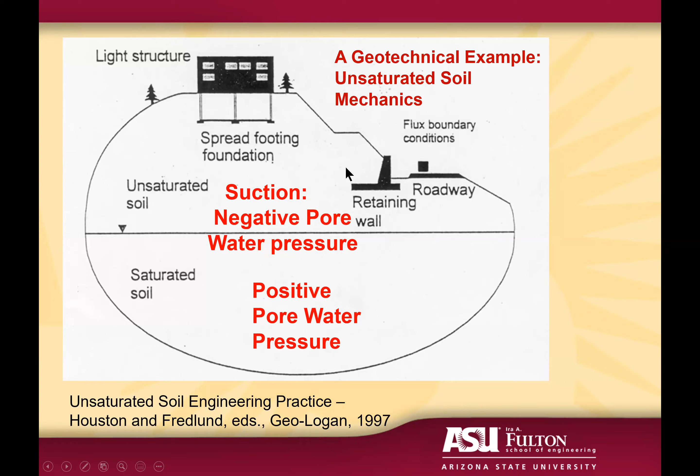We started our geotechnical profession thinking about saturated soil, and we find that we live most of our life up here in the unsaturated zone. So what is the problem with implementation? Why is unsaturated soil important in geotechnical engineering practice? Well, again, a lot of things we do are above the water table.

It impacts slope stability, bearing capacity, settlement, pavements, deep foundations. There are collapsible soils, which compress when they're wetted, expansive soils, which expand, dams, embankments, retaining walls. This is just a few examples of why unsaturated soils is so important in geotechnical and civil engineering.

A very well-known example of why it's important is a case study of a slope in Hong Kong that was presented in 1987. The slope we talk about here is very high, 90 meters or so, relatively steep, located above the groundwater table, which is here. So we're talking about this slope above the groundwater table. And at the base of this slope is an existing building.

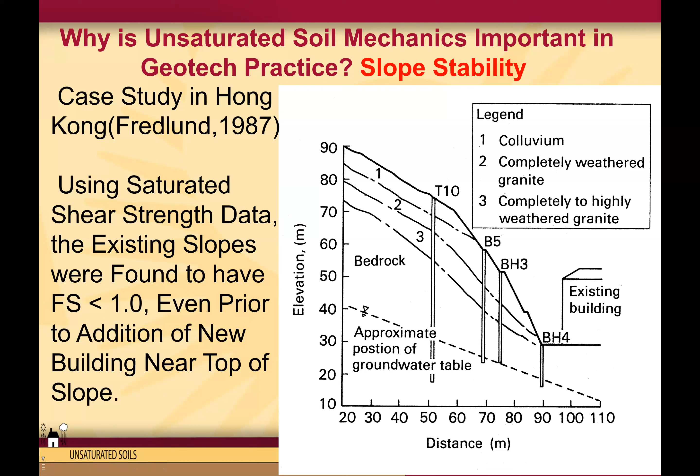The idea was they were going to do some construction at the top of this slope and wanted to study its stability. Using saturated shear strength data, which is typically used in geotechnical engineering, the existing slopes were found to have a factor of safety less than 1 even before the building was to be put in place. So this was an unacceptable situation.

So if we bring in unsaturated soil mechanics, now what happens is we find that above the water table, we actually have some negative pore water pressures, or some suction. And these suctions are not great. They're in the neighborhood of 40 to 50 kPa, but they're quite stable because anytime we're above the groundwater table, we have negative pore water pressures.

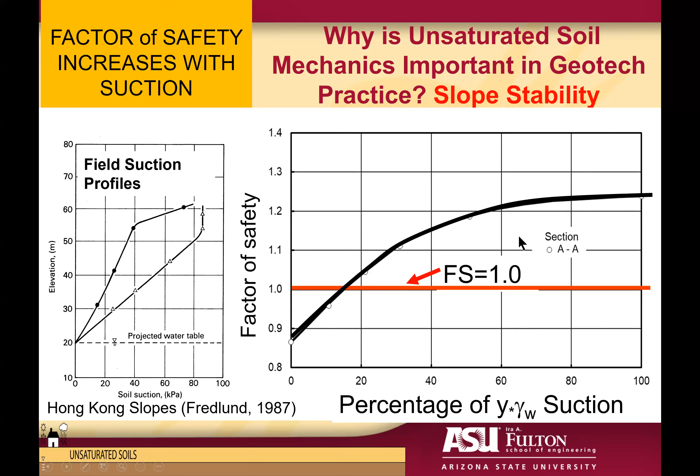So look at what happens here. This red line represents a factor of safety of 1. Before we take into consideration soil suction, remember we were below that number. But taking into account some soil suction, you can see that the factor of safety builds and builds, comes above a factor of safety of 1, and eventually in many regions of the slope reaches a very nice region of 1.1 to 1.2, even 1.25. So the soil suction has a major impact.

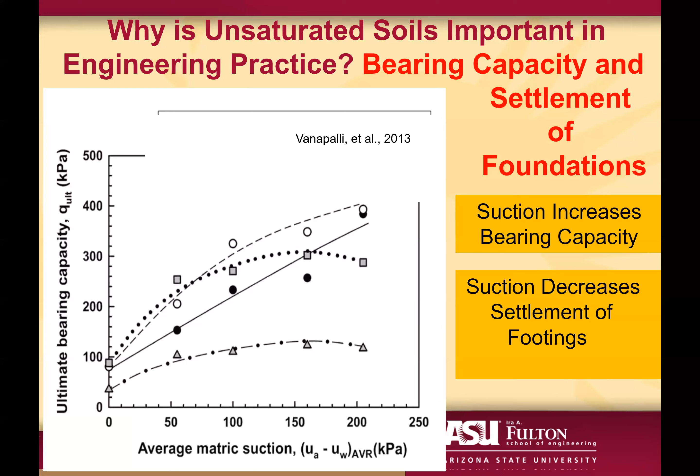In addition, soil suction has a major impact on bearing capacity. Here we're looking at the ultimate bearing capacity, how much stress we can put on our foundation systems, for example, versus the average suction in the profile. As you can see, the bearing capacity increases as the suction increases, and therefore it becomes very important to take this into consideration. If we do not consider how much additional strength or capacity we get from the soil suction in the unsaturated zone, we're over-designing all of our footings and foundation systems.

So let's take a brief look at the history of unsaturated soil mechanics. In the 1940s and 50s, we discovered that we could actually control and measure soil suction. A lot of this work came from our friends in the soil science field, but by the 1950s or so, we were actually measuring soil suction. Unsaturated soil mechanics theory was developed in the 60s to the 70s, where we basically identified the role of soil suction in soil behavior.

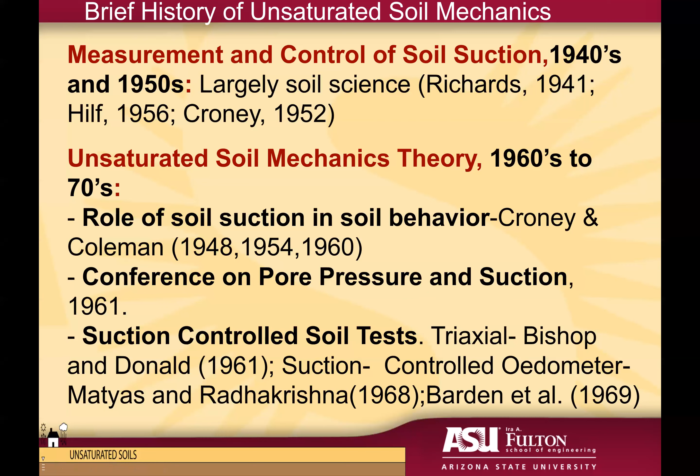Again, 48 to 60, we started having conferences on pore pressure and suction in the 60s, and we were able to control suction and do soil tests with unsaturated soils by controlling suction and also confining stress for triaxial tests and for oedometer tests. This was all done in the 50s, 60s, and up to the beginning part of the 1970s.

So really the 1960s to 1970s became the time when unsaturated soil mechanics emerged as a discipline, and we had a theory behind it. What was found in the development of the theory was that a single valued effective stress, which we learned in our first geotechnical engineering courses for saturated soils, was proposed also for unsaturated soils. For saturated soils, most of you who've had any beginning geotechnical class know that the effective stress is the total stress minus the pore water pressure.

It was proposed that we consider an effective stress for unsaturated soils, which was the total stress minus air pressure, plus a parameter, chi, which is a function of the soil suction, multiplied by the soil suction itself, designated as UA minus UW.

However, in development of the theories for unsaturated soils, we found that a single valued effective stress was shown to be inadequate for describing both volume change and shear strength behavior. In fact, the chi parameter was not degree of saturation. It was first proposed that way, but it was not limited in range from 0 to 1, so it had to be something other than degree of saturation.

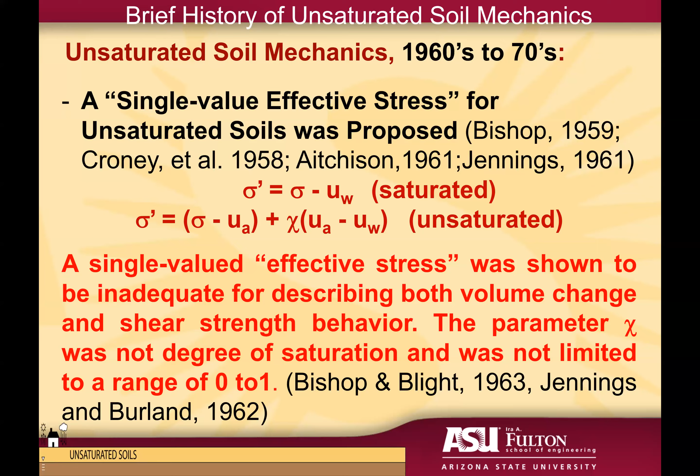So what was done was early on, the idea of developing an effective stress for unsaturated soils was abandoned, and we moved into a new era where unsaturated soil mechanics was really born, using two independent stress state variables, an approach consistent with existing saturated soil mechanics methods.

So when we deal with materials or soils above the groundwater table, we now have two stress state variables to think about. One is the net total stress, or sigma minus UA, and the other is the soil matric suction, or UA minus UW, sometimes shorthanded as S. Normally we will just refer to this as the soil suction, and I will do so in this presentation.

So the net stress and the matric suction were found to be effective in controlling both shear strength and volume change, but we had to keep them separate and couldn't put them into one effective stress like we did with saturated soils.

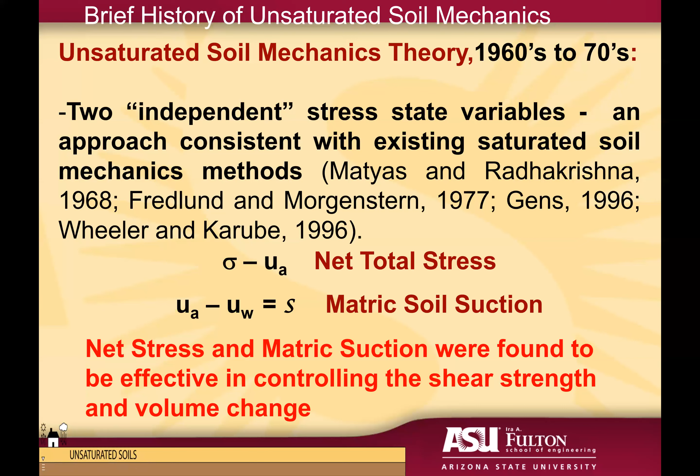Moving on with our history of unsaturated soil mechanics, in the 1960s to 70s we had our stress state variables of total stress and suction, and found there was actually no need to combine these two stresses into one equation to solve engineering problems. In fact, we discovered there was no equation possible for a stress state description with just one equation combining the two stress variables.

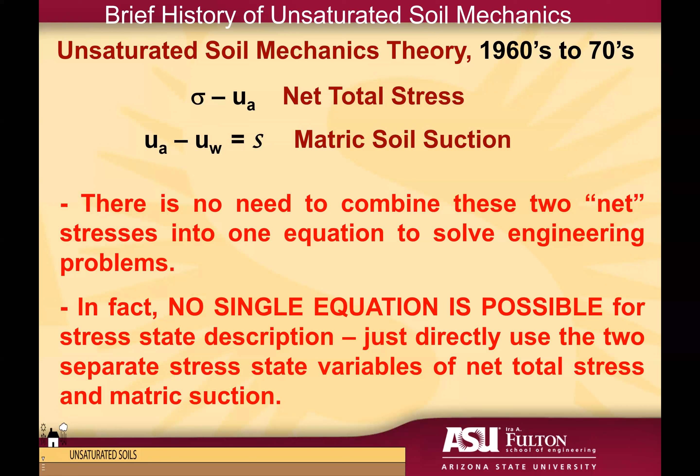So we just went about directly using the two separate, independent stress state variables of net total stress and matric suction. Then in the 70s to the 90s, we moved beyond the basic theory and started developing more advanced constitutive models to describe the behavior of unsaturated soils in terms of these two stress state variables, net total stress and suction.

We had piecewise elastic models, which we started with. We developed elastoplastic models with the work of Alonso et al. in 1990, and elastoplastic hardening. A lot of this work was done by Alonso and colleagues, and also Fredlund and Rahardjo had the book they published in 1993, the Unsaturated Soil Mechanics textbook.

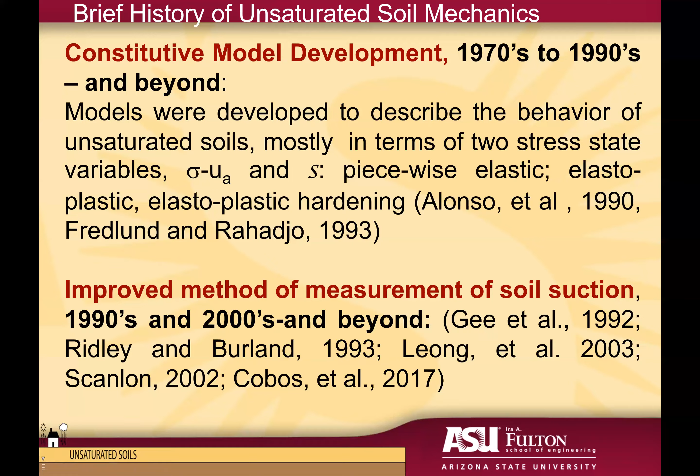We moved on in the 90s to the 2000s to improve methods of measuring soil suction, having had the theory under our belt. So the 90s and beyond became a period where we were looking forward to emphasizing implementation of unsaturated soil mechanics in routine geotechnical practice. There were many discussions on this in our technical committees and conferences. So now in the 1990s and 2000s in particular, we're ready to implement.

So how did it go? Well, the geotechnical engineering profession has had a sound theoretical basis for solving unsaturated soils problems for nearly 45 years. So let's take a look now at how we're doing on use of this theory in routine practice.

And again, remember, this is an example. If you are not in geotechnical engineering, you may have your own example, but for unsaturated soils, let's take a look at what happened. First, let's take a look at the role of university professors and educators.

I say the university professor has a major role to play in implementation of new technology into practice. Why is that? It's because the university professor teaches upcoming engineers what they need to know as they enter practice. But if we take a look at civil engineering classes, especially undergraduate classes, I think we need to ask: are we perhaps a bit stuck in the mud, or if you're in structures, stuck in the concrete, when we talk about what people need to know about civil engineering?

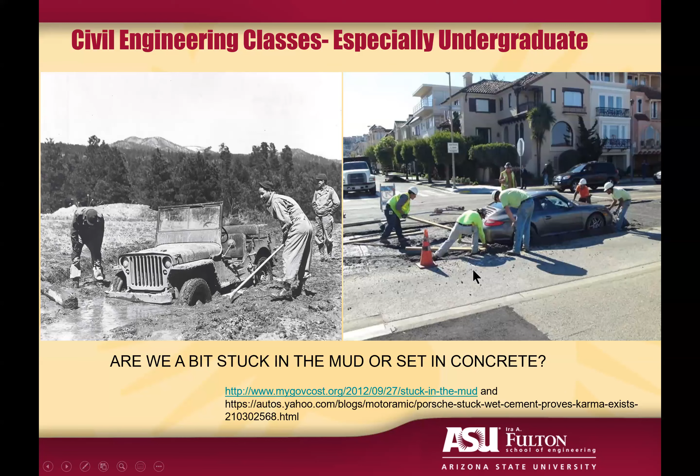So when we have our introductory geotechnical classes, are we still teaching the same things we taught a long time ago? When we teach our structural engineering classes, how much have we changed?

So as an example, if you look at introduction to geotechnical engineering classes today, what we find is that the emphasis is on laboratory tests, classification of soils, saturated or perhaps dry but not unsaturated.

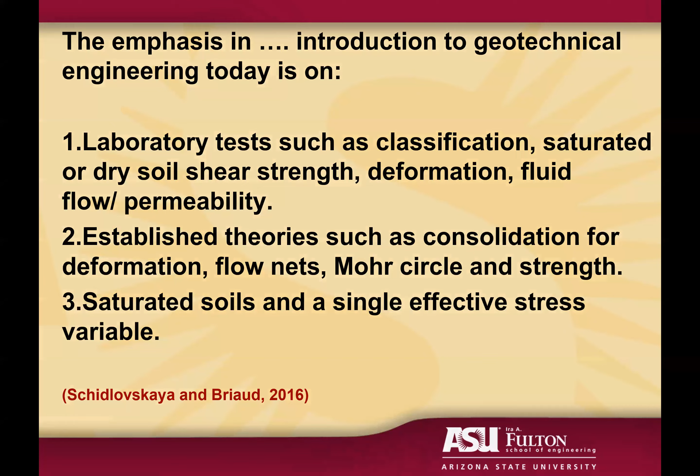So saturated soil shear strength, deformation, saturated fluid flow and permeability, establishment of theories such as consolidation for deformation, flow nets, Mohr circle, and shear strength, usually of saturated soils. So saturated soils and single effective stress is what we're teaching today. Now what was being taught in 1978? I happen to know because I was an undergraduate student at that time, and I took my first geotechnical course. What was taught was laboratory tests such as classification, saturated or dry shear strength, deformation, fluid flow, permeability, saturated soils, theories such as consolidation, flow nets, Mohr circle, shear strength, saturated soils, and a single valued effective stress.

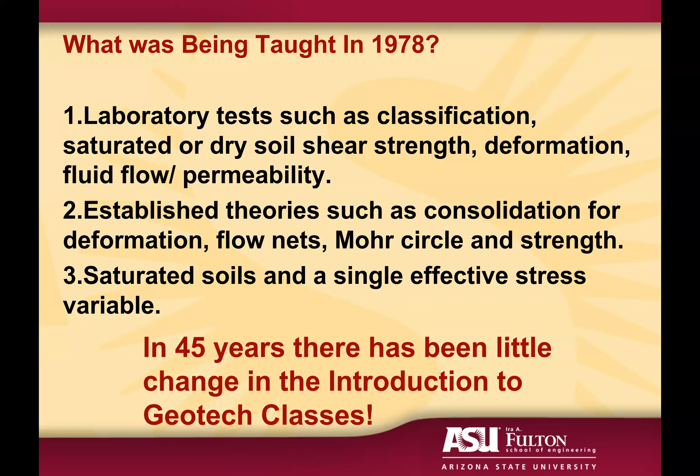So if that list looks familiar to you, it's because it's exactly the same as what we're teaching today in most geotechnical introductory classes. In 45 years, I'd say there's been very little change in the introduction to geotechnical engineering classes. Once in a while we'll toss in a few new items here or there, but I think some professors, including myself, are a little bit guilty of this.

So what are some possible paths to improvement and getting out of this rut? Well, one thing we should be doing is having more conferences and open discussion on civil engineering education, development and sharing of new course materials for introductory classes, and perhaps obtaining peer review comments on our course materials. For example, I think it's good to see the new Education Technical Committee for the ISSMGE in geotechnical engineering.

These things are all very much needed and perhaps need more of our attention. Here was a conference held in 2016 called Shaping the Future of Geotechnical Education, one of the ISSMGE conferences, where it was stated by Jean-Louis Briaud: professors have the unique and most important responsibility to help young minds think and impact their future in the most constructive way, while making it fun rather than rehashing old notes. This takes energy, dedication, hard work, but the outcome is well worth the effort. We must make the effort to change the status quo of our introductory geotechnical classes.

So a decade or maybe a little bit more back, Dr. Zapata, who will actually be speaking with you later in this conference, and I received some funding from the National Science Foundation to develop educational materials for introductory classes. I'm going to share with you just a small subset of the materials we developed as part of that project.

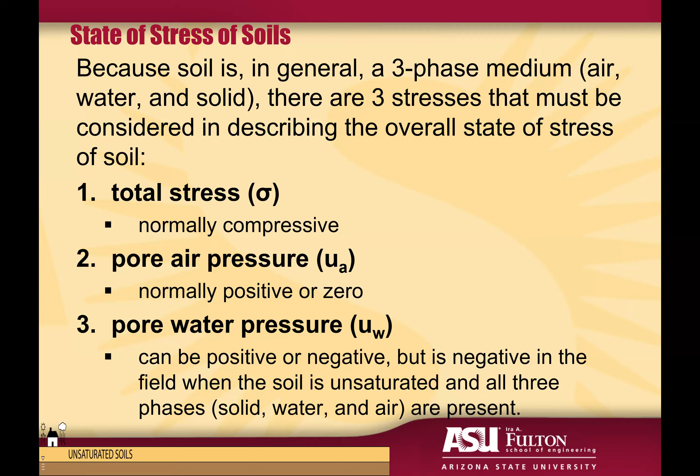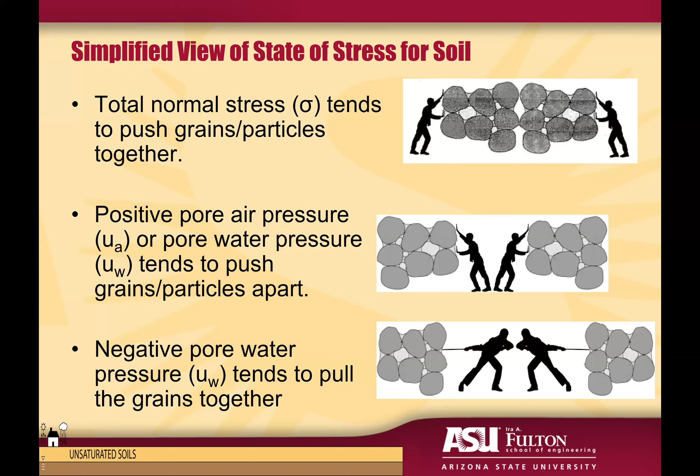In a simplified view here, the total normal stresses, sigma, tend to push our soil particles together. The positive pore air pressure and pore water pressure both tend to push the grains apart. Negative pore water pressure, on the other hand, tends to pull the grains together. So total stress pushes the grains together, positive pore air pressure and positive water pressure push the grains apart, and negative pore water pressure pulls the grains together. That's basically what you need to know about stress states.

Further, it has been well demonstrated that if we choose to combine the three stresses into two net stress variables, we have two variables that we can measure and which can be applied and controlled externally to the soil, both of which tend to keep the grain particles together. The first is what we call the net stress, or sigma minus UA, and the second is what we call the matric suction, or just the suction, UA minus UW, which we abbreviate as S.

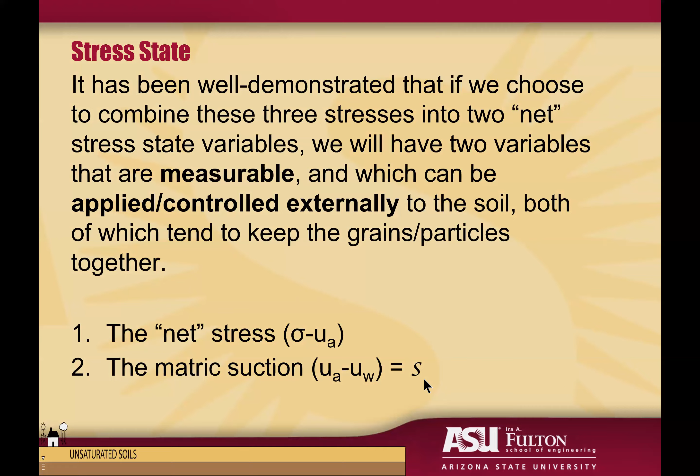So we can take this and simplify this for saturated soil conditions. As the soil is wetted, more of the void space is filled with water and less with air, and in that case, the suction decreases.

As the soil becomes very wet, the pore air becomes discontinuous and eventually exists in just little bubbles. As the pore air becomes discontinuous and the air space in the void approaches zero, our suction approaches zero, and UW can actually become positive when the soil is saturated.

A saturated soil has only two phases, the soil matrix and water, and thus for the saturated soil, there are only two stresses remaining, the total stress sigma and UW.

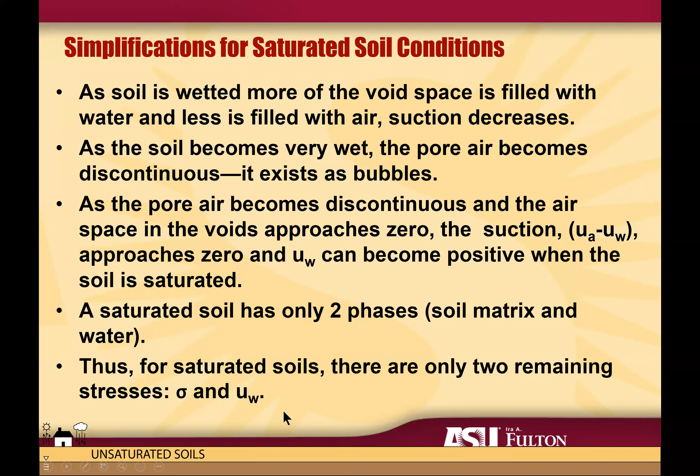When the pore water pressure is negative, it tends to pull the grains together. However, when the pore water pressure is positive, such as when you get significantly below the water table, the pore water pressure tends to push the grains apart.

The pore water pressure is negative for saturated soils above the groundwater table, but positive for saturated soils below the groundwater table, and that's true even in the capillary zone. So if the soil is saturated and you're above the groundwater table, you're still going to have negative pore water pressures, but if you're below the water table, they're going to be positive.

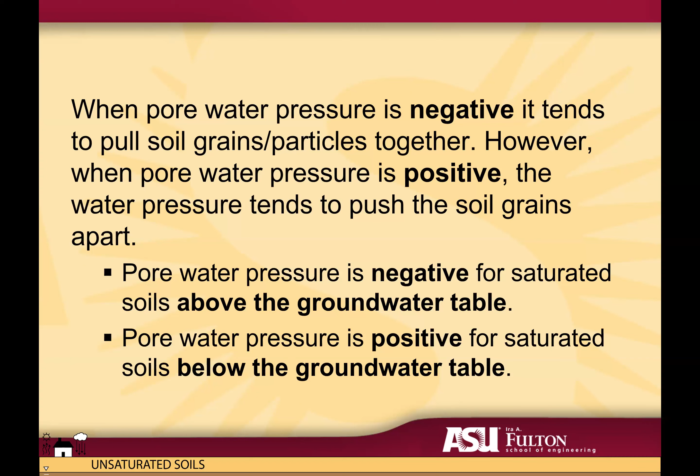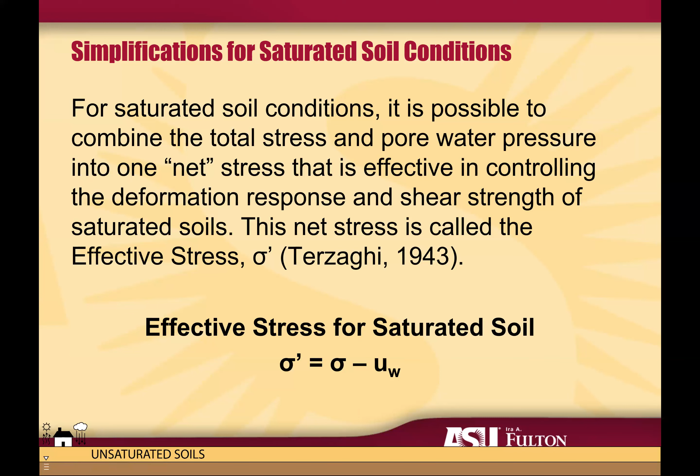Now, for saturated soil conditions, it's possible to combine the total stress and the pore water pressure into just one net stress because we only have two phases. This net stress is called the effective stress, controlling the deformation response and shear strength of saturated soils. It's denoted sigma prime, introduced by Terzaghi, giving the familiar effective stress equation: sigma prime, effective stress, is equal to sigma minus UW.

So let's move on now that we've looked at educators and some of the things I think educators can do to help bring things into practice. Let's take a look at the role of researchers in implementation of new engineering design in routine practice.

Researchers have a lot of roles to play in bringing research to practice: development of theory, establishment of testing methods that allow measurement and control of relevant variables, development of constitutive models, establishment of protocols for property determination, design parameters, and design methods that can be practically used by practicing professionals, demonstration of theory and methods, and the search for continuous improvement, breakthroughs, and enhanced understanding. All of these must be done by researchers.

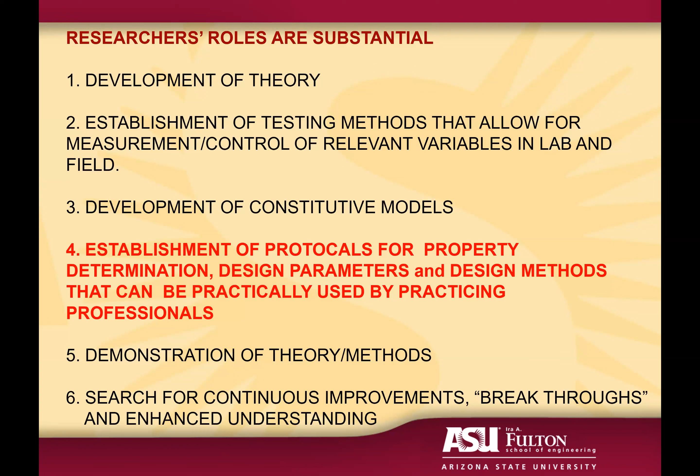I would argue that we very often fall down on item four, which is development of protocols and methods that are practically usable by professionals in routine civil engineering and geotechnical projects.

If you go to research paper conferences, often these are not student or practitioner friendly. What you'll find is researchers talking to researchers. I know this is true in my field, and a lot of times it's very complex, and we don't boil it down to here's what you really need to know and here's the simple way to use it.

So there's not a problem with this. We need this type of discussion, but we also need to carry it further.

Let's take again a look at unsaturated soils conferences as an example. These are just a subset of some of the things you often will see in presentations of unsaturated soils researchers at our conferences. To some extent, if you're engaged in that particular discipline, you'll have no trouble following these things. But if, for example, you are new to the field, maybe you just started thinking about unsaturated soil mechanics, you may have a hard time following some of these more complex things.

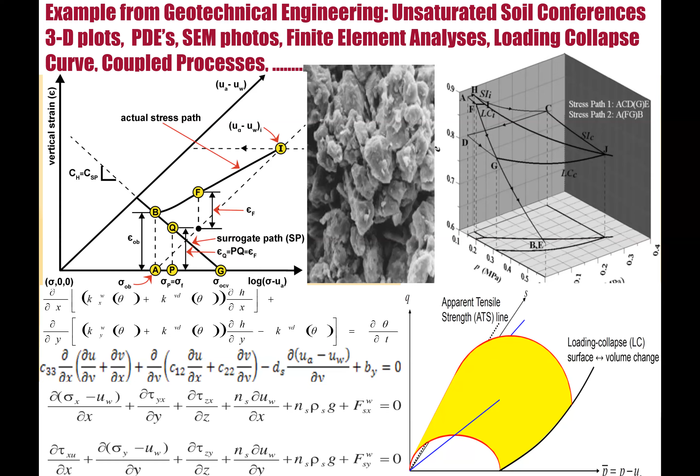Another thing I've noticed happens in research is that a lot of times we keep revisiting the same topic over and over again, kind of like Groundhog Day. So we've already done that, but let's take a look because maybe we can improve on it, maybe it's not quite ready. So we kind of hold ourselves to a high standard.

An example of this in unsaturated soil mechanics, one of the best examples I can think of is this effective stress issue.

You may recall when I went over the history of unsaturated soils that I said in the late 60s and 70s, we said the single valued effective stress doesn't work for unsaturated soils, so we have to use these two independent stress state variables. However, research reemerged on whether there might be an effective stress for unsaturated soils in the 2000s and beyond. There were a lot of attempts in the 60s, which were discarded because they were not proven appropriate, particularly the Bishop's equation, which goes back to the 50s. But in spite of this, in 2000 or so, people started looking at this again. So in spite of having a sound framework for solving unsaturated soil mechanics problems using two stress state variables, and having abandoned the search for a single effective stress in the 1960s, that search started again around the 2000s.

Here's some of the papers that started getting attention. I would argue, this is just my own personal opinion, that such revisiting of settled science creates an impression with students and practicing engineers that maybe these new methods we're hearing about are not yet ready for implementation. This type of impression can actually slow progress in moving things into practice, in my opinion.

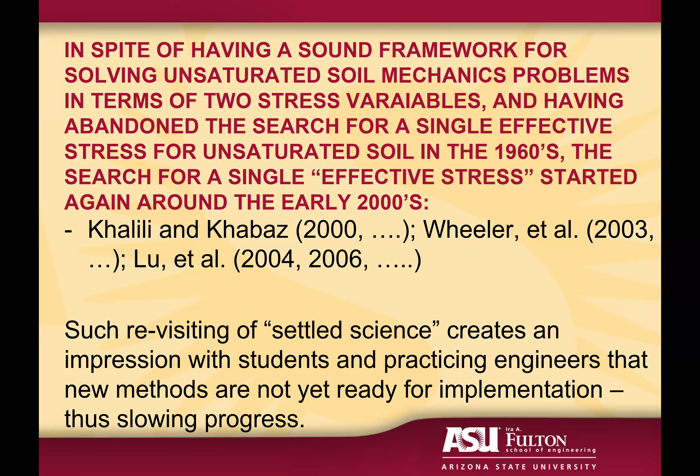Another thing researchers, including myself, like to do is what I call looking under the street light. This fuels incremental change. We look where we can see the easiest, as opposed to looking out in the dark areas where we can't see anything. So let's look further into the things we already think we know a little bit about. This is fine, and there's a lot of room for this, but a lot of times this is how we get incremental change.

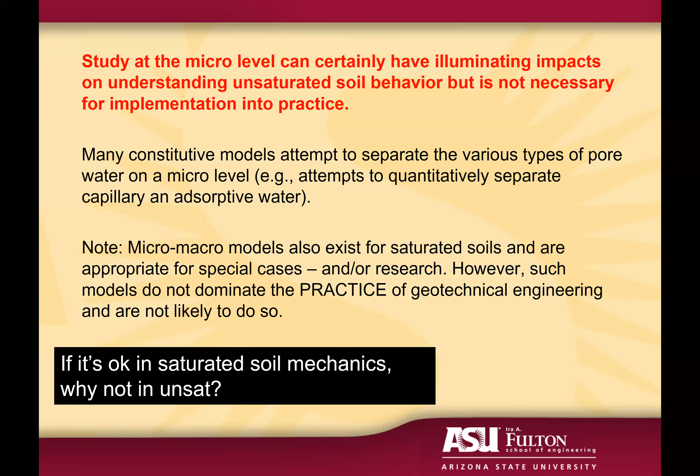But micro-macro models exist for saturated soils as well. They've already been developed, and they're appropriate for special cases and also for research. However, these models do not dominate what I call the practice of geotechnical engineering, and in my opinion, they're not likely to do so for many years. So the practice is more based on macro level response, or what we call continuum mechanics. If that's okay for saturated soil mechanics, why not for unsaturated soil mechanics? We can move on with our continuum macro approach and bring practitioners into the game a little bit better.

So the soil stress state variables in geotechnical engineering and saturated soil mechanics have always been phenomenological, such as the effective stress. It was observed phenomenologically, through laboratory testing, that the effective stress people are familiar with for saturated soils was effective in controlling shear strength and deformation of saturated soils.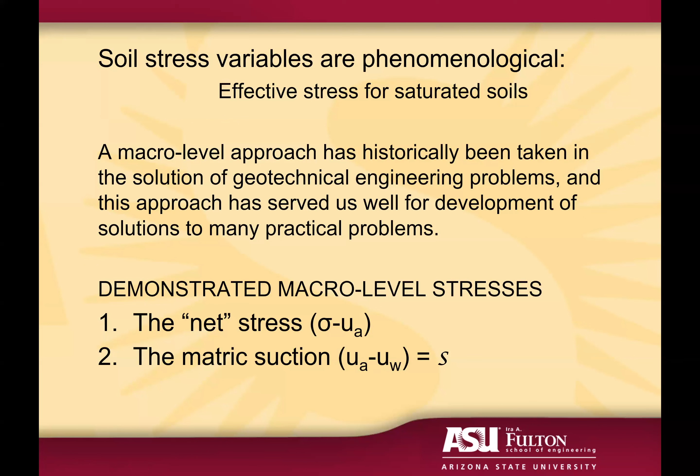So a macro level approach has historically been taken in the solution to geotechnical engineering problems, and this approach has actually served us very well in coming up with many practice-based solutions. We are already ready in unsaturated soil mechanics with demonstrated macro level stresses that we know can be measured and controlled externally to the soil. Those two stress variables are the net stress, sigma minus UA, and the suction, UA minus UW or S. So we're ready at the macro level to do implementation.

But sometimes using a different measuring stick, saying, oh no, we need something better. We need things at the micro level, for example, compared to what we do in saturated soil mechanics. This different measuring stick is not needed for routine application of unsaturated soils theory. In fact, a different measuring stick can slow progress towards bringing research into practice.

All right, now let's turn our attention to another party, and that is the people who fund engineering research, and take a look at their role. Most of my experience is in the US, I assume it will at least have some resonance with people in Costa Rica. But the sources of research funding that I normally see are government agencies, especially in civil engineering.

The reason for that is because much of our civil engineering research is dominated by public infrastructure, transportation and buildings and things for the public. But we have government agencies, private companies, and nonprofit corporations. So these are the primary sources of funding.

Now, civil engineering research, as I said, is dominated by government agencies. Requests for proposals, I find, are rarely aimed at applied research or implementation of findings into practice. Rather, a lot of times they're focused more on fundamental things as opposed to applied research. Now, applied research is really what we need to implement our more fundamentally based research into the practice of civil engineering.

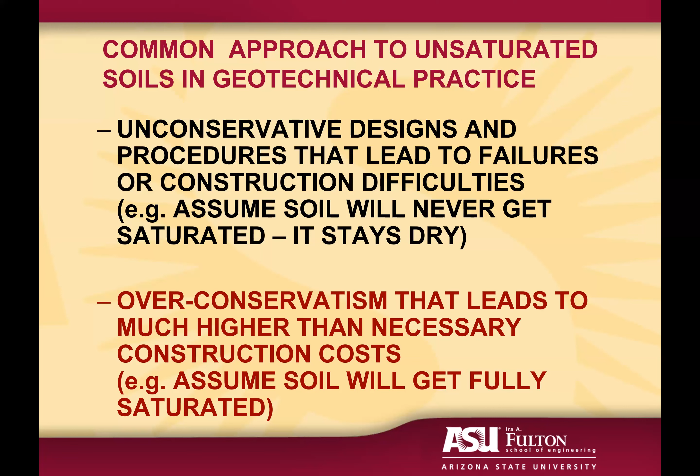Meaning, let's assume it gets wet all the time, it's always wet, it's always saturated. If we assume that about the soil, this leads to much higher than necessary construction cost. Why? Because we have built-in factors of safety that are much, much larger than we really even understand. So assuming a soil will always get fully wetted is over conservative, and we're throwing away a lot of money, a lot of which is coming from the public or our governments. So this is really not sound engineering practice, and it would be better to move beyond this.

So for implementation, again using unsaturated soil mechanics as an example, the most important thing we need to recognize is the role of the controlling stress variables, net stress and suction, and be willing to adopt simpler models rather than ignoring unsaturated soil theory. Be willing to be conservative with respect to how much suction can be relied on in the field, but not overly conservative so that we're having very, very high factors of safety and throwing away too much money. So implementation of unsaturated soils theory in routine geotechnical practice is a critical part of minimizing the cost of maintenance, repair, and building of our infrastructure, and therefore a critical part of life cycle cost.

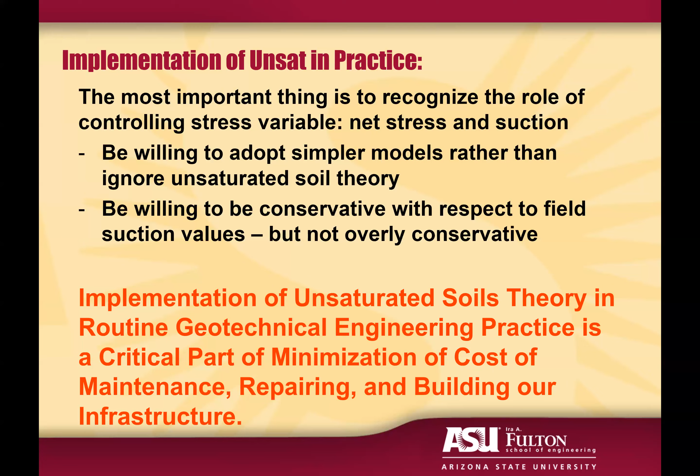So I've had the chance to ask many practitioners over the decades that I've been studying in this field as to why they don't use unsaturated soil mechanics. And when I ask practitioners why they don't use this theory, the answers generally have nothing to do with the debate we find ourselves having in research about the two stress state variable versus effective stress. In fact, most practitioners are completely convinced that soil suction has an effect on the response of unsaturated soils, that's been demonstrated to them. The problem, rather, is that most geotechnical engineers are not sure what they can rely on for soil suction under field conditions. So that was the big question, remember, that doesn't lie under the streetlight.

The primary reason that practitioners give to me about why they're not using unsaturated soil mechanics is litigation concern. When they use something new, not just in geotechnical engineering but in any field, they worry that they might be liable if something goes wrong, or that there will be legal suits brought against them. This is particularly true when practice protocols have not been laid out by researchers in well-established, peer-reviewed literature, because practitioners rely on researchers to give them the applied studies they need in order to implement without so much litigation concern.

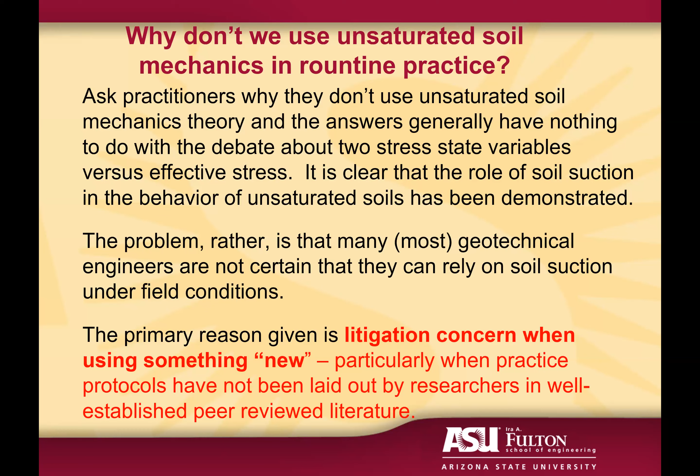So I guess we've come full circle now back to researchers, not quite to educators yet. But let's ask ourselves, if you don't believe me, is the fear of litigation really driving our routine civil engineering practice? And I say the answer is to a large extent, not exclusively, but it certainly plays a role.

Here's a quote from Dusenberry at the meeting of ASCE's grand challenge to reduce infrastructure lifecycle cost by 50% by 2025. So ASCE had a challenge to reduce infrastructure lifecycle cost by 50% by 2025. Wonder how we're doing. Well, anyway, here's what Dusenberry says.

You know, I really think that we've done this to ourselves. The legal system hasn't done this to us. Movement towards prescriptive codes long precedes our current litigious bent. I think our profession is naturally conservative because of our concern for life safety. So we actually become very conservative, and I think we've stepped away from responsibilities that civil engineers used to have. We're creating our own mess.

Now, I would say that a responsibility of civil engineers is to actually think about the life cycle cost and how much money we're spending. And this money can come in terms of just dollars or environmental harm, climate degradation, and so forth. So this is our job, but we're very conservative. We don't want to do something new.

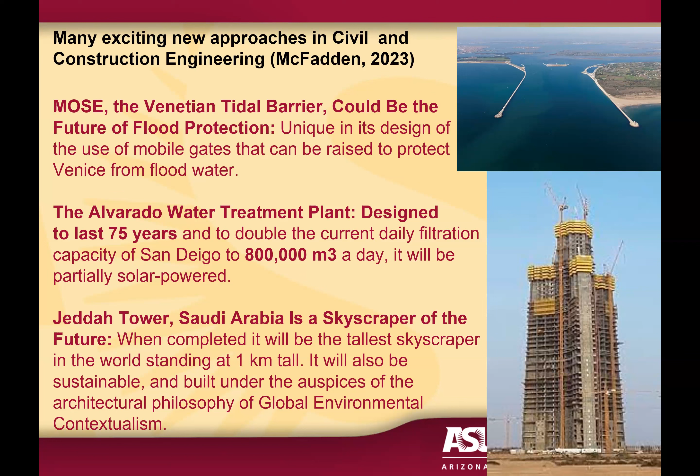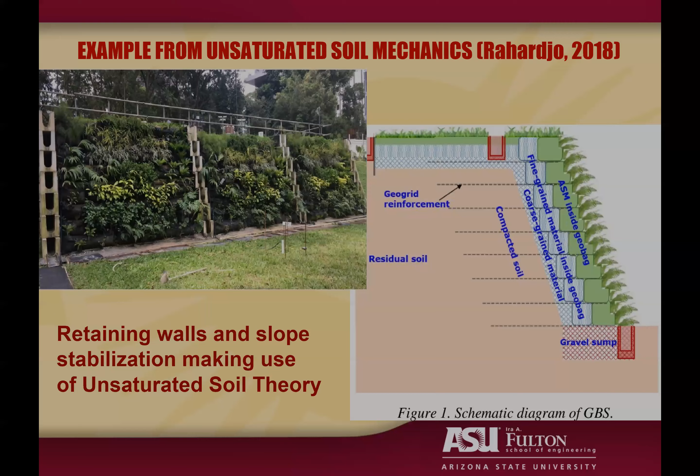However, I would argue that we need to take some of these more exciting things that are happening, innovations and bringing new theory into practice. It's time to bring research and innovation to our daily routine in civil and construction engineering. We've talked about today some of the things that are impediments to moving research into practice. Something for you to think about as you go through your role as an educator, a researcher, maybe a funder of grants, and maybe even as a practitioner.

Or are we missing a step in what researchers should be doing? Should we be looking at how we're funding projects and putting more emphasis onto applied research? I would say yes. And as practitioners, are we overly worried about liability and litigation? So those are some take homes for you to think about. And with that, I will thank you for your attention today and see if there are any questions.